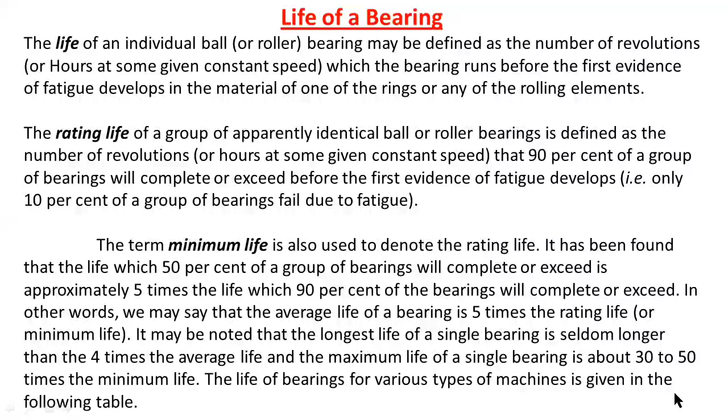Okay, the life of a bearing for various types of machines is given in the following table. This table shows life of bearing for various types of machines. This column shows applications of bearings, and this column shows life of bearing in hours.

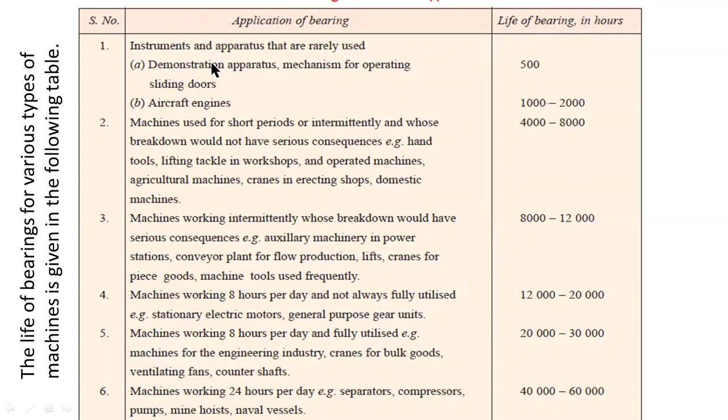Okay, the life of instruments and apparatus that are rarely used, that is, demonstration apparatus, mechanism for operating sliding doors, and aircraft engines. These are having minimum life as 500 hours.

Okay, similarly, machines used for short periods or intermittently and whose breakdown would not have serious consequences. Example: hand tools, lifting tackle in workshops, hand operated machines, agricultural machines, cranes in erecting shops, domestic machines. For these machines, hand tools, lifting tackle in workshops, operated machines, agricultural machines, cranes, domestic machines.

These machines have a minimum life of 4,000 to 8,000 hours. Okay, for aircraft engines, minimum life is 1,000 to 2,000. Okay.

Now for the third example, machines working intermittently whose breakdown would have serious consequences. Example: auxiliary machinery in power stations, conveyor plant for flow production, lifts, cranes for piece goods, machine tools used frequently.

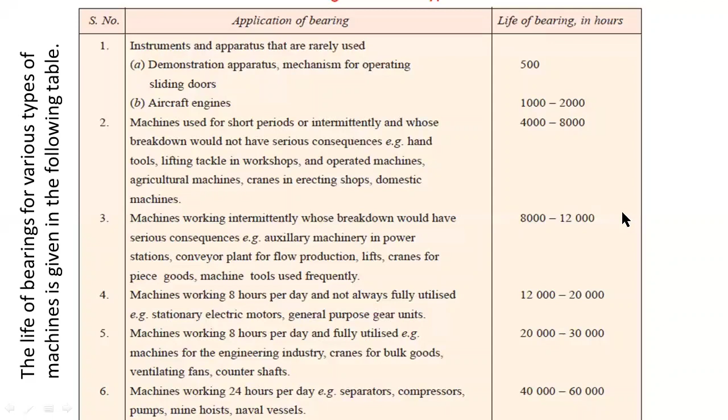Similarly, for machines working 24 hours per day, for example separators, compressors, pumps, mine hoists, naval vessels, we are using minimum life of bearing as 40,000 hours to 60,000 hours. Okay, so these are the applications and these are the corresponding life of bearing in hours.

Now these are the values for a service factor, that is Ks. The service factor is denoted by symbol Ks, K suffix S. These service factors are very important for finding the load acting on bearings. Here this column shows type of service, and this column shows value of service factor.

For uniform and steady loads, you have to consider the service factor Ks as 1. For light shock loads, you have to consider service factor as 1.5. For moderate shock loads, you have to consider service factor as 2.0. That means Ks equal to 2 for moderate shock loads.

For heavy shock loads, you have to consider service factor as 2.5. And for extreme shock loads, you have to consider service factor as 3. Okay, so these are the examples for service factors.

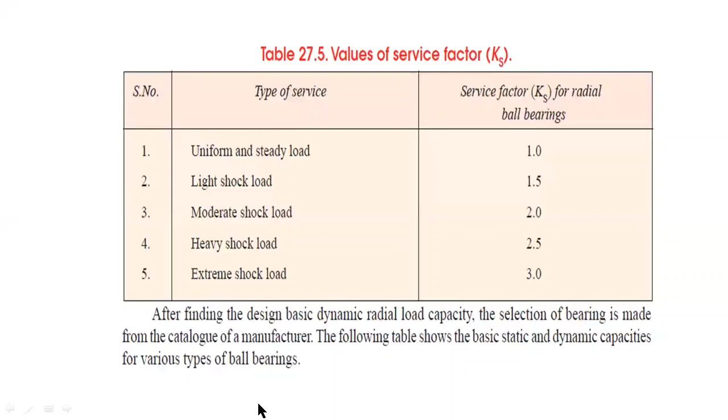Okay, now I am going to explain about reliability of a bearing. We know that the rating life is the life that 90% of a group of identical bearings will complete or exceed before the first evidence of fatigue develops. So the reliability R is defined.

The reliability, capital R, is defined as the ratio of number of bearings which have successfully completed L million revolutions to the total number of bearings under test. Sometimes it becomes necessary to select a bearing having a reliability of more than 90%.

According to Wiebull, the relation between the bearing life and the reliability is given as L by L90 equal to log e 1 by R divided by log e 1 by R90, whole power 1 by b. Here the value of b is 1.17. So this is the relation between bearing life and reliability values. R is the reliability and L is the life.

The above expression is used for selecting the bearing when the reliability R is other than 90%. Here L is the expected life of bearing in revolutions, and L90 is the life of bearing for 90% reliability.

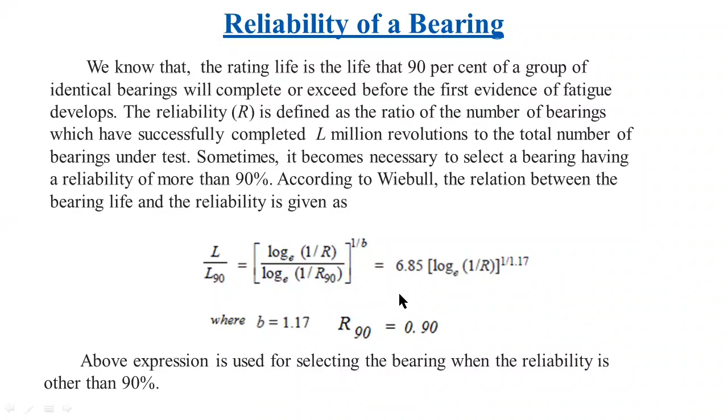And the final formula for life of bearing: L by L90 equal to 6.85 log e 1 by R, whole power 1 by 1.17. This is the final formula for the life of bearing.

Now I am going to explain about dynamic load rating for rolling contact bearings under variable loads. The approximate service life of ball bearings or roller bearings is based on the fundamental equation: rating life L equal to C by W whole power k into 10 power 6, or the basic dynamic load rating C equal to W into L by 10 power 6 whole power 1 by k. This is the formula for dynamic load rating.

Here capital L is the rating life or expected life of bearing, capital C is the basic dynamic load rating, and W is the equivalent dynamic load or load acting on the bearing. Here the value of k depends upon the type of rolling element.

Already we have discussed the types of rolling elements. We have two types in rolling contact bearings: ball bearing and roller bearing. In ball bearings we use balls as rolling elements; in roller bearings we use rollers. So for ball bearings we use k equal to 3, and for roller bearings k equal to 10 by 3, that is 3.33.

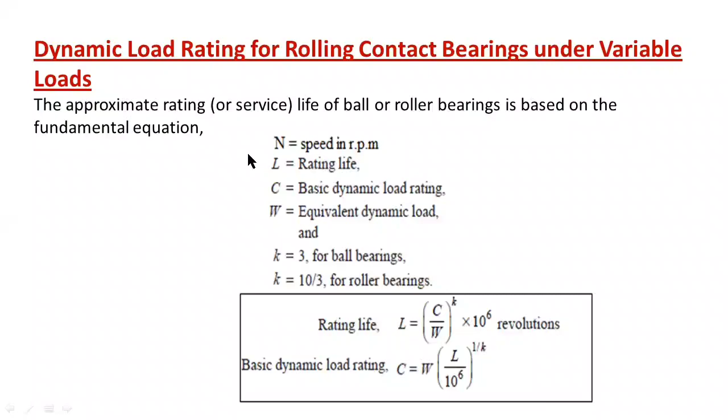Now, capital N is the speed of the bearing or speed of the shaft in revolutions per minute. It is very important to estimate the life of bearing, in hours or in revolutions. Now this is the formula for life of bearing in revolutions.

This is the relation between life of bearing in revolutions and life of bearing in hours, where L is the life of bearing in revolutions, whereas LH is the life of bearing in hours. Capital N is the speed of the shaft or speed of the bearing. This is the formula for life of bearing in revolutions.

Here LH is the life of bearing in hours. For converting this life in hours into minutes, you have to multiply with 60. Then you have to convert to the number of revolutions, that's why you multiply with N, the revolutions per minute. So L equals 60 into N into LH.

Represents the life of bearing in minutes. Okay, here LH is the life of bearing in hours. Then you have to convert this life of bearing in hours into minutes. That's why I multiplied this life of bearing in hours by 60. Then it will convert it into life of bearing in minutes.

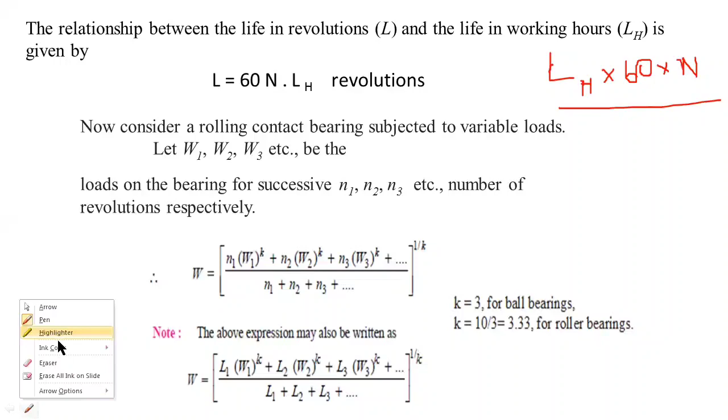Now, if the rolling contact bearing is subjected to variable loads, that means different loads acting on the bearing, then let W1, W2, W3, W4 and so on be the loads on the bearings for successive intervals N1, N2, N3, N4, where the successive intervals are revolutions N1, N2, N3.

The formula for dynamic equivalent load: W is the total load. The dynamic equivalent load W is equal to... N1 is the time interval or number of revolutions. N1, N2, N3 are the number of revolutions or time intervals.

Then (N1·W1^K + N2·W2^K + N3·W3^K and so on) divided by the total number of intervals or total number of revolutions, whole power 1/K. Here the value of K depends upon ball bearings and roller bearings. For ball bearings you have to consider K equal to 3, and for roller bearings K equal to 3.33.

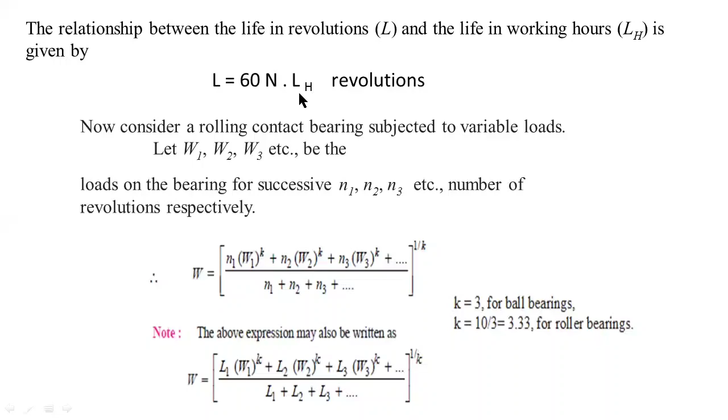The dynamic equivalent load may be defined as the constant stationary radial load or axial load, WR and WA, which if applied to a bearing with rotating inner ring and stationary outer ring would give the same life as that which the bearing will attain under the actual conditions of load and rotation.

Under combined constant radial load and constant axial or thrust load, the dynamic equivalent load W equals X·V·WR plus Y·WA. Here V is the rotation factor. V equals 1 for all types of bearings when the inner race is rotating, and also V equals 1 for self-aligning bearings when the inner race is stationary.

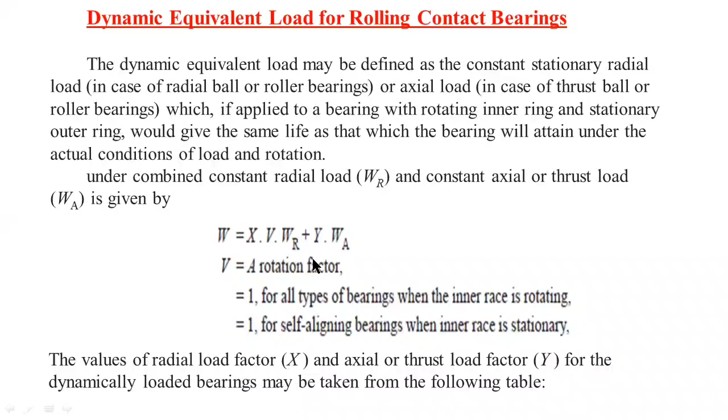The values of X and Y for dynamically loaded bearings may be taken from the table for different bearings. These are the types of bearings: deep groove ball bearing, angular contact ball bearing, self-aligning ball bearings, spherical roller bearings, taper roller bearings, and these are the specifications of the bearings.

These are the X and Y values when the ratio WA/WR is less than or equal to e. When WA/WR is greater than e, these are the values of X and Y. This is the value of e. By using this value of e, you have to consider X and Y values.

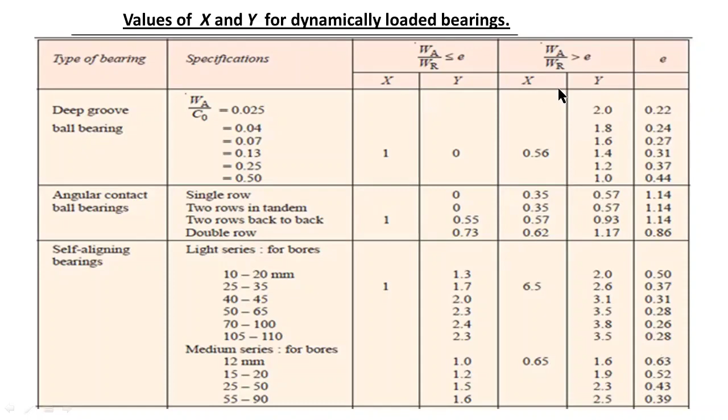Equivalent radial load W is 3 kilonewtons for 10% of time. Equivalent radial load means W. This is W, and the value of W equals 3 kilonewtons. The time interval given is 10% of time.

Okay, so the first load is 3 kilonewtons for 10% of time. That means W1 equal to 3 kilonewtons; you have to multiply by 1000 to convert kilonewtons, so W1 equal to 3000 newtons, and the percentage of time given is 10%. Let us consider N, or T, as the total time taken by radial loads. From that total time you have to consider 10%, so you multiply 10% with total time: 10 by 100 equal to 0.1 into total time.

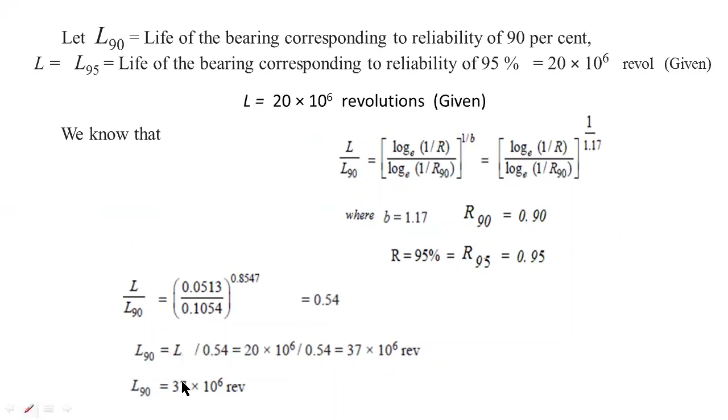Now the final formula for dynamic load rating: capital C equal to W into L90 by 10 power 6 whole power 1 by K. Here you know the value of L90, so substitute the value of L90, that is 37 into 10 power 6. The value of L90 is obtained from this formula. You have to substitute this L90 value in this formula.

37 into 10 power 6 divided by 10 power 6. Cancel this 10 power 6 value in numerator and denominator and substitute the value of K in the power. The final value for dynamic load rating capital C equal to 5.54 kilonewtons. This is our required answer for this problem. In this problem we have to find the value of dynamic load rating; capital C is the dynamic load rating.

The formula for dynamic load rating: capital C equal to W into L90 by 10 power 6 whole power 1 by k, where W is the basic dynamic equivalent load and C is the dynamic load rating. L90 is the life of bearing for 90% reliability. And here the value of small k depends upon type of rolling element. For ball bearings you have to consider k equal to 3. For roller bearings the value of k equal to 3.33.

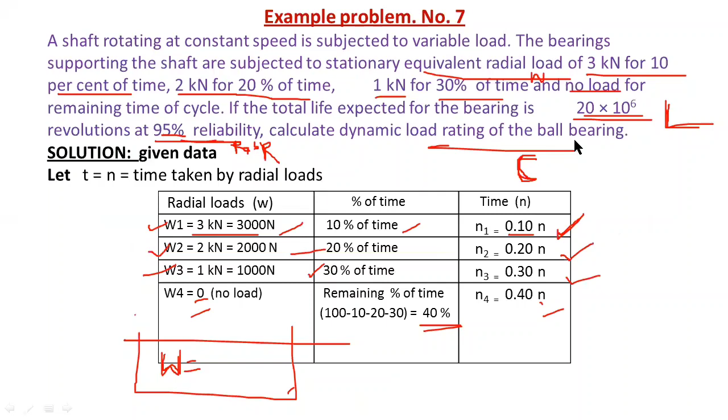So here in this question, ball bearings. You have to calculate the dynamic load rating of the ball bearing, so you have to find the answer for a ball bearing. So I consider the value of k equal to 3 for ball bearings. So the final answer for capital C equal to 5.54 kilonewtons.

Okay, in the next class I will explain more problems on dynamic load rating.